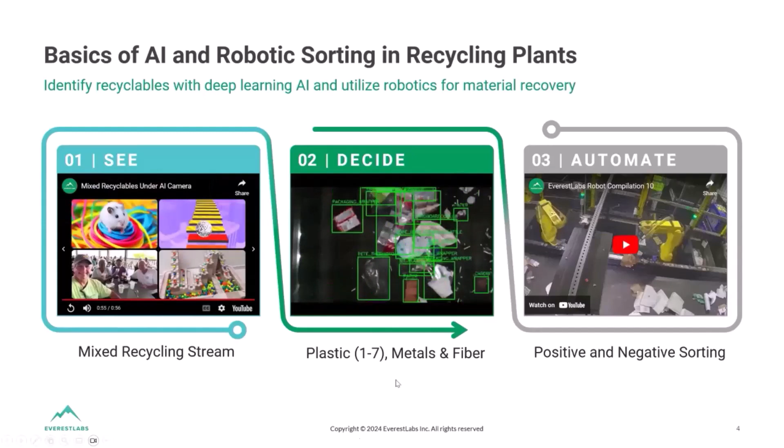You can click play on the second one. From that, we create a 3D digital capture of all of those materials and use our proprietary AI models to perform decisions in milliseconds on precisely what the object is, what's its value, and so many other useful metrics. We can identify over 30 general material types as well as do specific brand recognition.

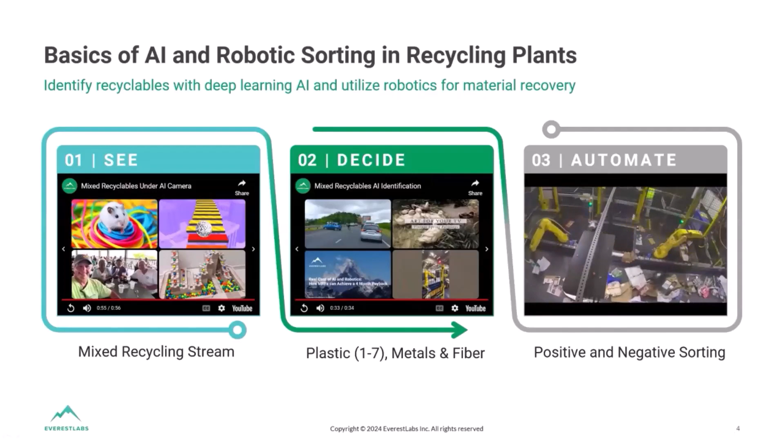Can I play on the third one? And with all the data that's captured, our clients are enabled to then make strategic decisions on how to improve their plant operations and incorporate automations, one of which is our effective robotic cells that can do both positive and negative sorting. These are designed to be easily installed and produce efficient recovery rates, all while being hands-off, meaning there's minimal daily maintenance and any monitoring is done in an EverestLabs robotic ops center that operates 24/7.

Next slide, please. So what do you get when you apply AI and robotics to your last chance line? The data we're seeing there is immense. First, you gain that understanding of the material composition on that line. It shows you all the materials and their values that are being sent to landfill. You're able to calculate what your recovery rates are and can easily see what your landfill costs are as well based on tonnage and your local fees.

And with the analytics, you can do staff optimization. And with robots, you can actually automate pick prioritization. Your audits become easier and automated without having to do manual checks. And by identifying any inefficiencies in your operations, you can use robotics to better recover any recyclables that are still on that line. Next slide, please.

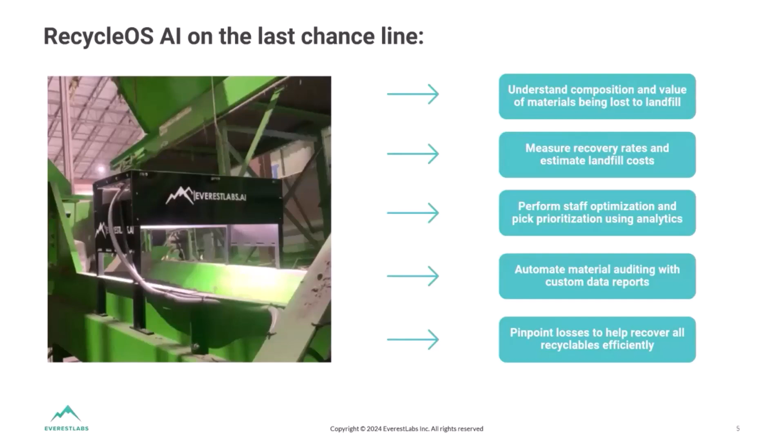So you've heard me reference data, but what does that actually look like? RecycleOS Data is our cloud-stored platform where all your analytics are accessible. We provide standard out-of-the-box dashboards for all our clients and can also configure those and customize your data sets based on your specific use cases or any initiatives that you may have. On the last chance line, the data that's available there, understanding the tonnage, your material comp, your true residue percentages, all help with understanding how your plant process and your equipment are functioning.

Similarly, you're able to quantify the valuables that are there. All the recyclable materials that you're losing to landfill. You can see the exact amount of money you're losing each week, each month, each year, and make changes to remedy that. For example, we've seen recyclers incur annual losses between $200K to millions of dollars a year. Next slide.

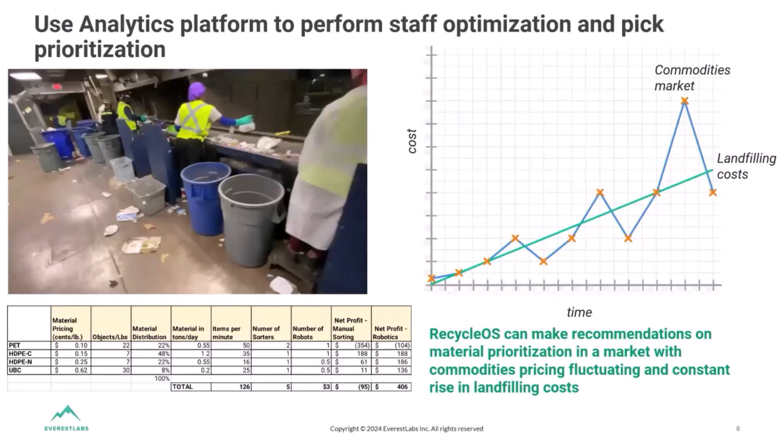The other use case of adding a vision system on the last chance line is to automate material auditing. On the left here, as you can see, this is how a lot of MRFs today really audit their material. A lot of it is manually audited. Sometimes there could be anywhere between 5 to 10 people auditing over a period of 8 hours, and that could be either once every month or once every quarter, again depending on regulations. What our system allows you to do is go completely autonomous by just installing a small footprint vision system on top of your conveyor line and being able to look at all the material that's coming on this line.

You also have the ability to go into the dashboards and pull the data for a particular time period. You could filter it either by the day, by the hour, or even by the month or quarter, depending on your requirements of your auditing processes. And you could really generate a report and use this system. Some of the common use cases are either, you may have some county or state regulations where you need to report a certain number of either aluminum cans or PET that's going to landfill. And sometimes you could set trigger alerts on the vision system that could send you either an email or a text to let you know that you're really crossing the threshold of a particular commodity on this line.

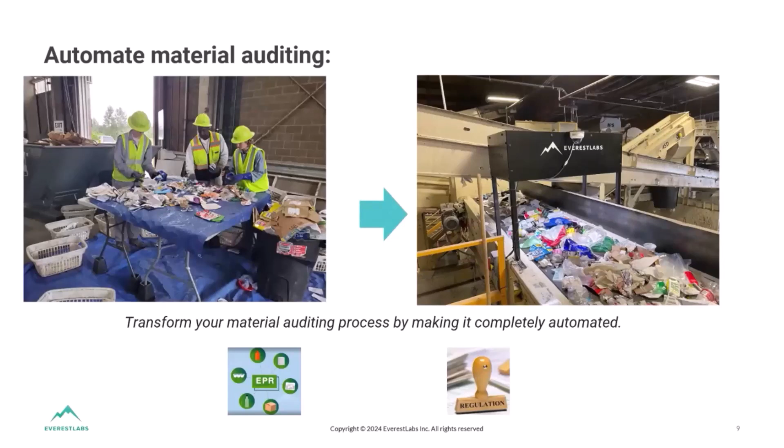And on states where EPR is legal or is being legalized, it may be necessary for certain MRFs to really have this auditing as a consistent process to really report on how much material is actually being sorted and what is the effectiveness of the sorting procedure at these recycling facilities.

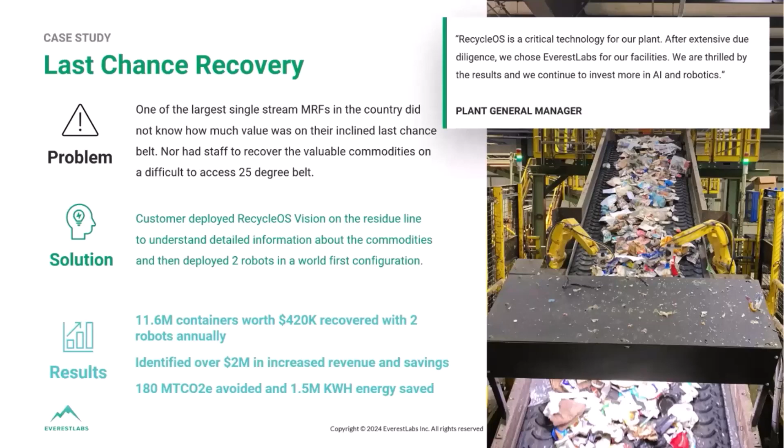Next slide. And Samir, I'll let you continue on. Thanks, Katie. So why do MRFs and recyclers choose EverestLabs AI and robotics?

Second is our hands-off operations. So we have a robot operations center set up in India where we have people really auditing these robots, and they audit them using software as well as hardware alerts. They constantly make sure that the environment the robot is in is okay.

Anytime when a suction cup needs to be replaced or an end effector needs to be cleaned, we make sure to send you a text and work with you on letting you know when a housekeeping procedure is necessary. We also provide alerts on the performance of the robot on the line, with full transparency on reports about the material, the picks per minute on different lines, and the pick success percentages. So you have complete visibility into the robots physically present at your recycling center. Anytime the performance drops or the robot isn't doing what it's supposed to, our team can look at it, fix it, and make sure it's ready to go.

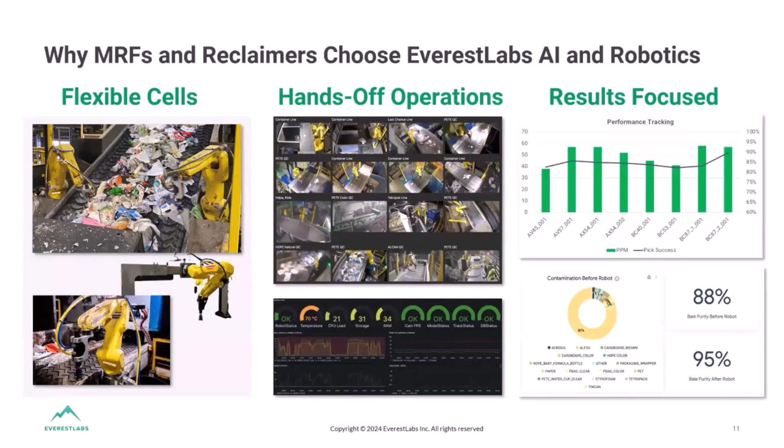So the key takeaways are that AI and robotics will become a common tool for MRFs to improve recovery and should be a key part of MRF upgrade strategies. That applies anytime you're putting an optical sorter in or doing a MRF upgrade—it's always useful to put a vision system on your in-feed as well as your last chance lines, so you can monitor all the material coming in and make sure the equipment is actually processing it properly. The next generation of robots we provide are either better than or as good as manual sorting.

Consistently, over an 8-hour period, our robots have proved to recover more than 60 items per minute, and that's really unheard of, either from our competition or from other human sorters. With a flexible robot cell design and as-a-service model, the payback on robot investment can be within months without big capital expenses.

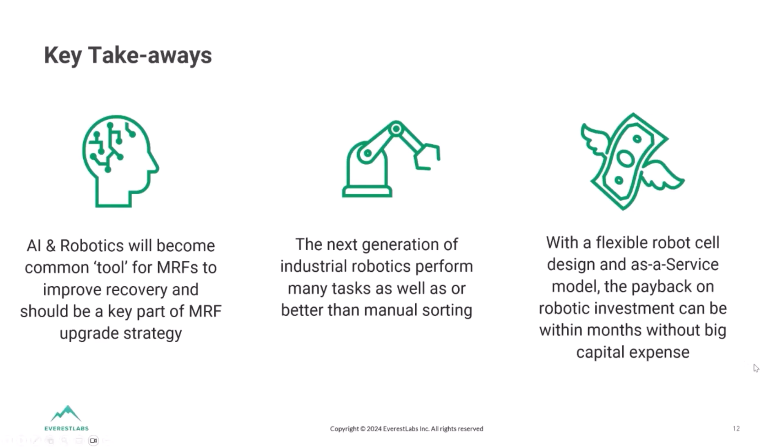So anytime you feel these equipment cost a million dollars and they're super expensive, just reach out. We have flexible pricing options, and these really don't cost a million dollars. We want to work with you, and we want to make sure we set you up for success. Our goal is to make sure we help you make more money through excess material sorting, and also by helping you save on labor costs.